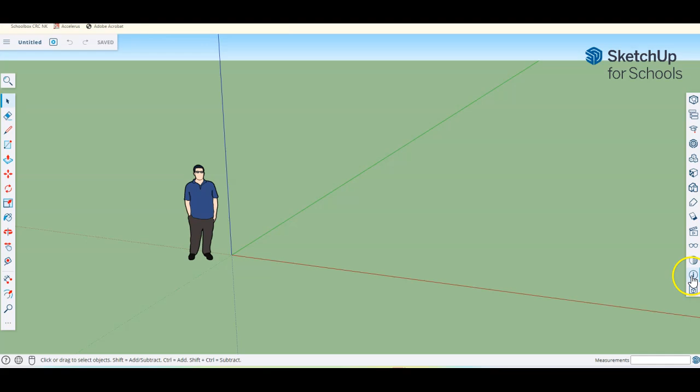I'll just jump into SketchUp here. As always, create a new project. Most importantly, when you start any new project, remember to check your measurements. Go to the little information button, length and units. Make sure you are set for millimeters, and 0.0 for precision is acceptable.

And then we're going to put that away. You can get rid of the little person if you want, they're not really needed at this point. And we're going to begin our modeling.

As we've been doing in previous models, start by thinking about the basic two-dimensional shape that you might want to begin with. Of course, each of these sides of the box are going to be simple rectangles as a basic shape that we then pull up into a three-dimensional piece.

I'm going to start with the longer side, which is going to be 120 millimeters long by 19 millimeters thick, and that's going to then be pulled up to 70, and we're later going to apply the rebates to that. So let's have a go.

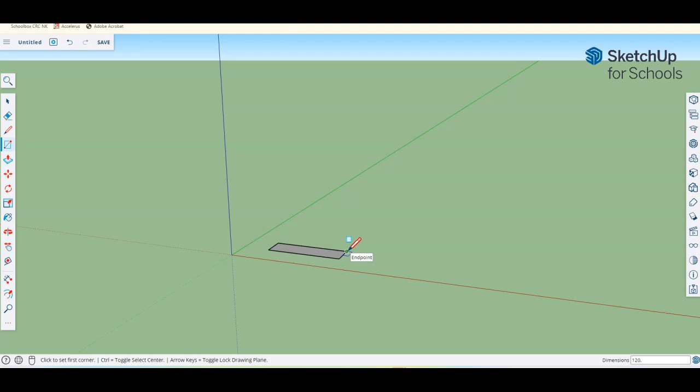We're going to draw the basic shape, so we know it's a rectangular shape. We let go of our mouse and type in our measurement: 120 long, comma, 19 millimeters for our thickness, and press enter. Of course, it should look like it shrunk down in this case.

We're going to zoom in. Of course, I am using a mouse, so I can use my scroll wheel to make it a lot easier. If you're not using a mouse, I strongly still encourage that you do - it makes life a lot easier in SketchUp.

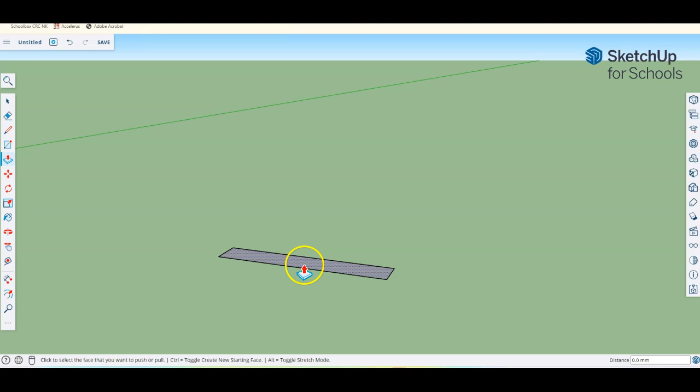Let's take our push-pull tool, grab the shape, pull it up by any amount, doesn't matter, just so long as we can see it is moving how we expect. Let go, type in our 70 millimeters for our height, press enter, and it sets its correct height.

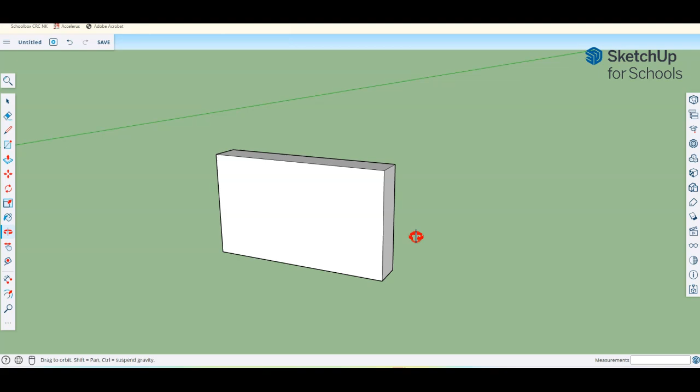So we now have our basic piece of wood, as if we cut this in class. We're now going to apply our rebates to this one. We know the rebate needs to be 19 millimeters from the end, because that is the same as the thickness of the piece of material that's going to slot into that. Again, this is something we've learned about in class by this stage.

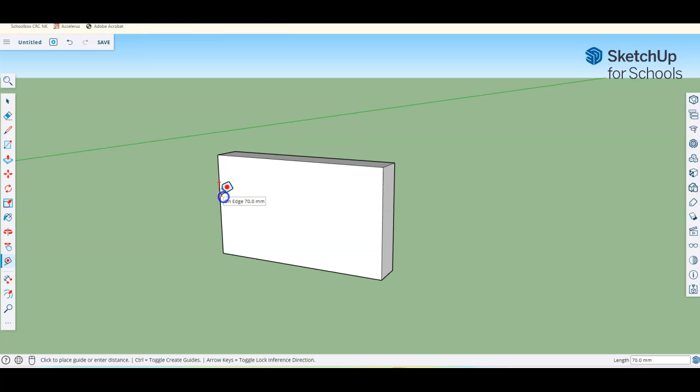So we're going to start doing that with our tape measure, it's the easiest way - just having a little mouse issue there, sorry. From the edge, let's come in, type in the 19 and press enter. We'll do that on both sides. Very important that we stay on the axes, type in our measurements, and come both sides.

Now remember, we can't push-pull with these lines because these are just construction lines, like temporary lines. So we're going to get our pencil now so we can actually fill in the part that we need. Using the intersection of the construction line and this edge, making sure we mark that point, let's bring that line down to match the other end, and the same on both.

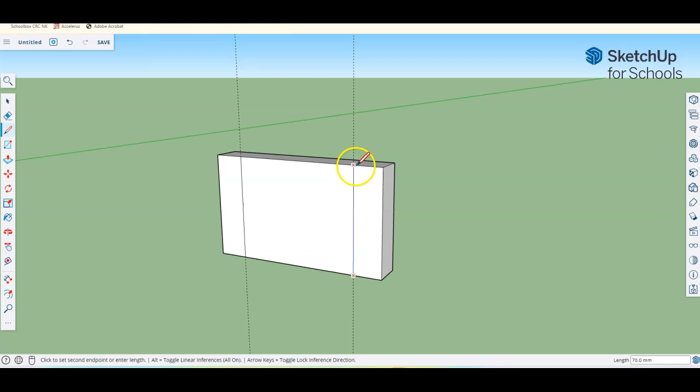This has created individual sections on our face, remember? So we can take our push-pull tool and see that each of those are separate, which means we can push that one in by 9.5 millimeters, because that is half of the thickness we want here. We can come across the other side, do the same, push it in, type in our 9.5 and press enter.

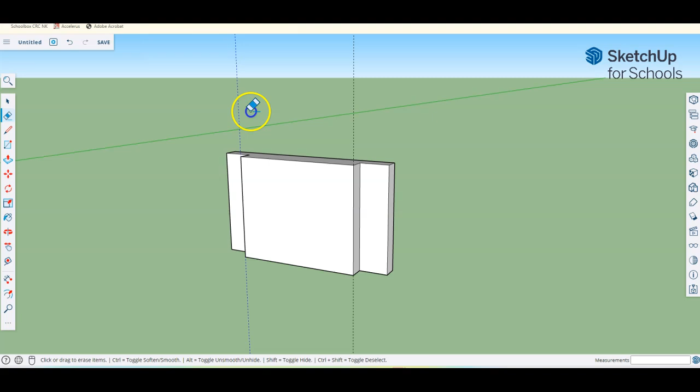So we now have our two rebates shown. Take the rubber and rub out our construction lines, and we have a finished piece.

Last thing we want to do to this piece before anything else is to highlight everything and turn it into a component so that we can move it around and duplicate it safely. Let's call this the rebate side and just press enter to save that.

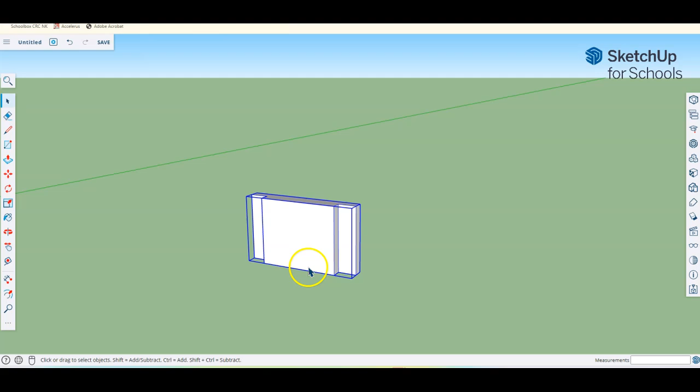So I have one piece, but if I now just zoom out a little bit, I want to think about a second one of these, because of course there are two sides to this. So what I'm going to do is simply, while that's selected, I'm going to copy it. So copy and paste. All right, and I'm going to put it over this side here. But this one's going to want to flip around 180 degrees to be facing inwards, because we've got one on each side.

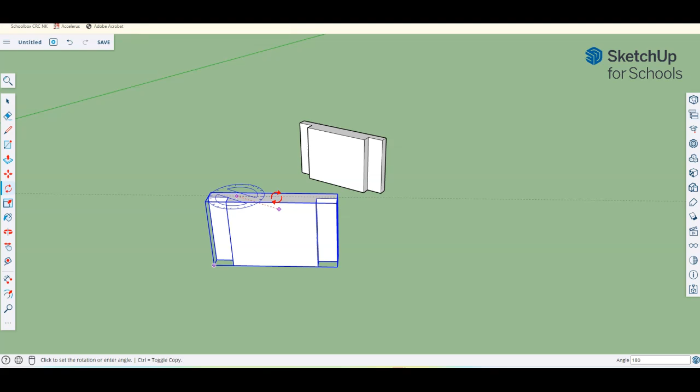So take our rotation tool, make sure that we are rotating on this top axis here. So 1 click, 2 clicks with the handle. Check that it is rotating in the way that we want. And of course, then I can just type in my 180 for the rotation amount. So it perfectly rotates 180 degrees, and we are done with that piece.

Now I'm going to jump back to the model for a second. These are the two pieces we've just done, this back piece and this part here with the actual rebates cut in. We now need to make this piece that goes in between. But it's important to note that it's not going to be 120 millimeters long. It's 120 from this corner to the very back corner, but we have to take into account the little bits, the 9.5 mil here, the 9.5 mil here, that we have for the rebate.

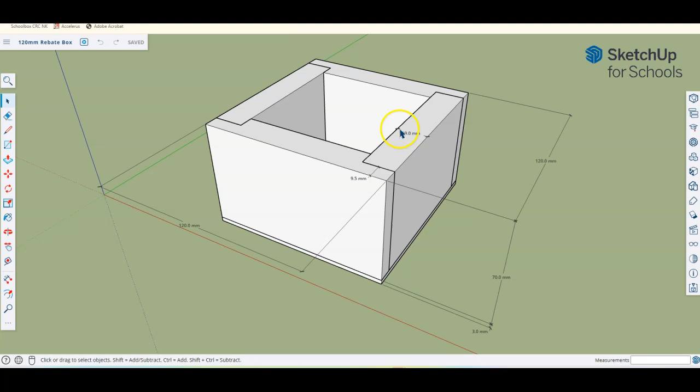So that 9.5 and that 9.5, if we add them up together, of course, we get 19. So really what we need is 120 millimeters from edge to edge minus the 19 that makes up the rebate, which means this piece in between is actually going to be 101 millimeters to get a total of 120 still. So we're going to model something that's going to be 101 millimeters long, still 19 millimeters thick and 70 millimeters high.

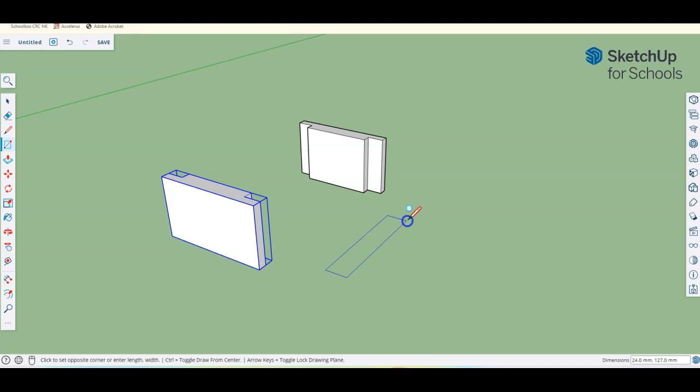So jumping back to the model that we are working on now, let's take our rectangle again and start with our basic shape. Now I could draw it crossways like I've been doing, but I know that later on I'm going to have to then rotate it 90 degrees to face this way. So why not start in that direction so that we don't have to do some extra steps? So I'm going to draw it this way instead. The only problem there, if I look down at my bottom corner, I have to reverse the measurements when I type them in, because my smaller measurement 24 is obviously this measurement across at the moment, and my longer measurement 127 is obviously this way.

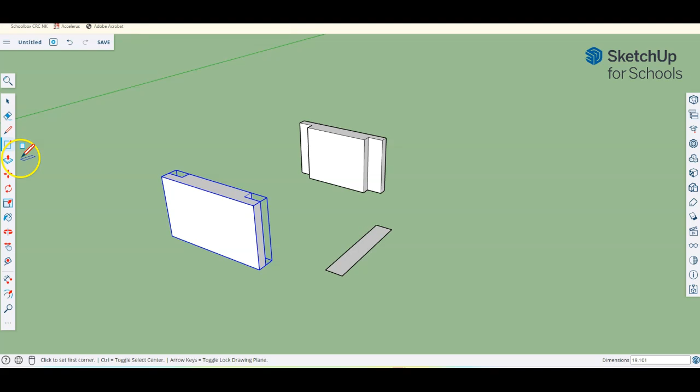So in this case, what I really want though is 19 still for the thickness. This has to be the first measurement this time. And as we just talked about, 101 for our second measurement, and press enter. So again, we've got our perfect shape. Take your push-pull tool and again, bring that one up by 70. We've done this lots of times now. And that is a finished piece now. There's no joint to do on this because the joints are done on the other piece.

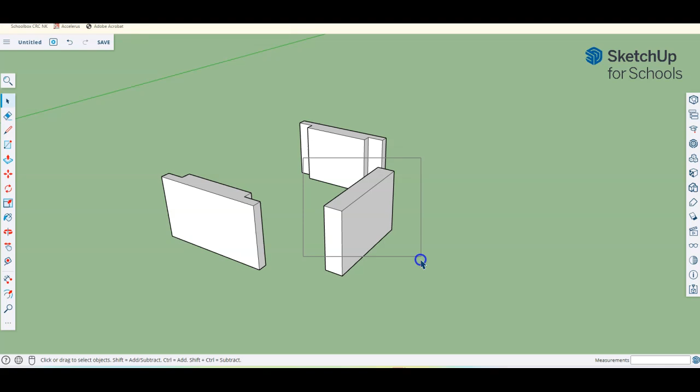Let's highlight everything that makes up that piece. Now, it doesn't matter that some of this is behind in the selection because it's not completely enclosed, because of course this is one big component, so I'd have to draw something that enclosed all of it if it was going to be made part of the selection. So this is safe to do. And we'll right click and make a component out of that as well. I'm just going to call that side, nothing special.

Like before, I need two, so I'm going to copy and paste that. I'm just going to put it roughly over this side here as well. So I now have all four pieces, two that we've done rebates on that were 120 millimeters long, and two that we've worked out need to be 101 millimeters to fit between. Let's start bringing those together. So I'm going to start with the one closest to me here.

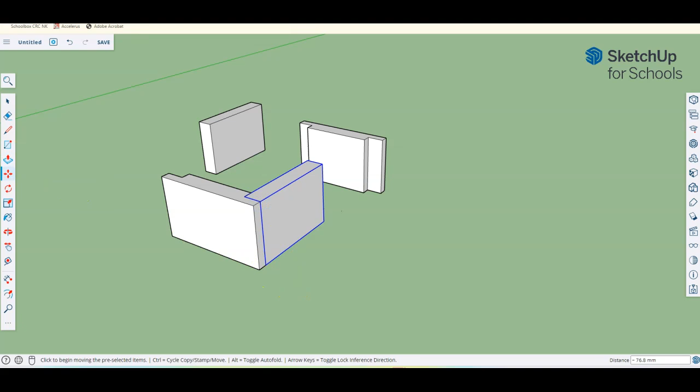I'm going to bring this side to join into this rebate, and we know that we can lock corners, for example. So I'm going to lock this corner here to where it would touch this corner here. So using my movement tool, let's grab that corner and let's lock it in place there. Let's do the same with the other piece. I'm going to grab that one over there. I might zoom in a little bit closer. And again, I'm going to lock this inside corner to the inside of the joint this time. And finally, I'm going to choose the back part with the rebate.

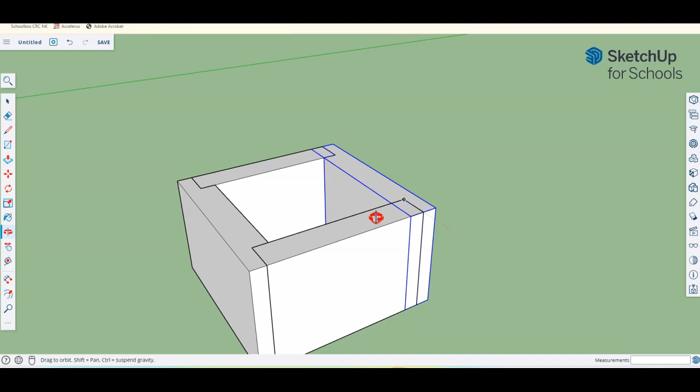And again, I'm going to lock that in. So let's use this corner here and lock it with, done that wrong, sorry, back corner there, and lock it with this one here. Sometimes you might need to rotate to get a better view. Remember, you can pick any corner, just as long as you can see where they touch each other, you can then lock them together. And we have finished the frame of the box.

Now, the last piece we need to model is the base, because of course, if I rotate this round, I can see straight through it at the moment. Now, there's two main ways you could probably do that. First one, of course, you could come over to the side, model a piece that's 120 by 120, and then pull it up to be, or down for that matter, to be 3 millimeters. And that's the base for your box there.

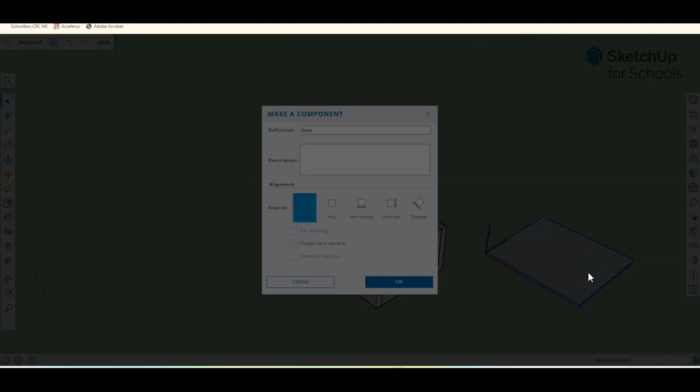You can grab that piece after turning it into a component. So let's do that quickly. Component, make component. I'm going to call this base. And of course you can move that into place. So I could take my selection moving tool, grab that top corner there and with a bit of playing, eventually get it to line up properly. There we go, it's just locked in now. And of course now I do have a base on my box.

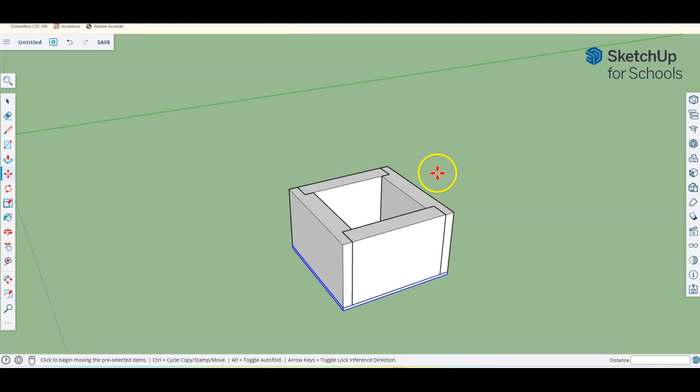But there's another way you could do it that might be a little bit more easy in some ways, I guess. So let me just delete this base there. Another way I could do it, because each of these are components, I could just literally rotate around to look at the bottom. I could take my rectangle tool and locking from one corner to an opposite corner, I could literally draw that shape in.

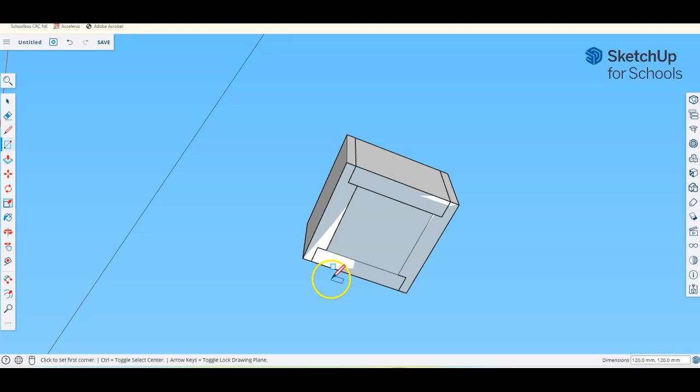We know it's going to be the right size because it's matched exactly to the box because we've used the corner references. And it's not affecting the box pieces themselves because this is a square, even though I can see the lines through it at the moment, but this is a square drawn on top of other components, and those components are not being modified. So I can still take my push-pull tool then and pull that down, type in 3mm, and of course I've now got a base.

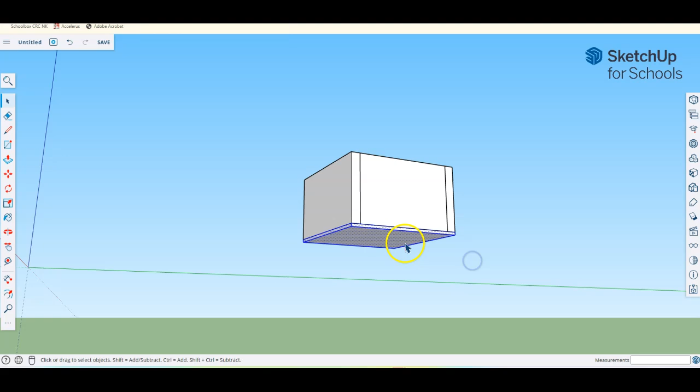I do want it to be a component still, and again I can grab my selection tool, I can draw a box that will grab all of that base, and the same as I said before, it's not going to affect the rest of it because I'm only selecting the whole base. None of the other sides are fully enclosed in this selection, so when I let go it is still only choosing the base parts. If I do look around, no other sides or parts were selected because they weren't fully enclosed in that selection box. So I'm still able to do that, make a new component and call this base. I'm going to call it base 2 just for reference.

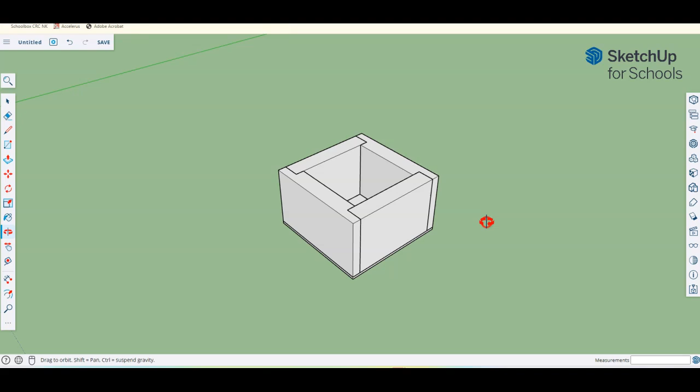So there was two ways we could do that. So again, ended up at the same point though, where we have all our sides done and we have a base properly modeled on. The final thing I'd probably do at this point is just double check some measurements. So take your tape measure, do things like check your thickness is still correct, 19, so on and so forth. Or even better, grab your dimensions tool. Remember, if it's not showing up there for you, grab it out of the full set of tools by clicking on the 3 dots, grab your dimensions tools, and let's put some dimensions in.

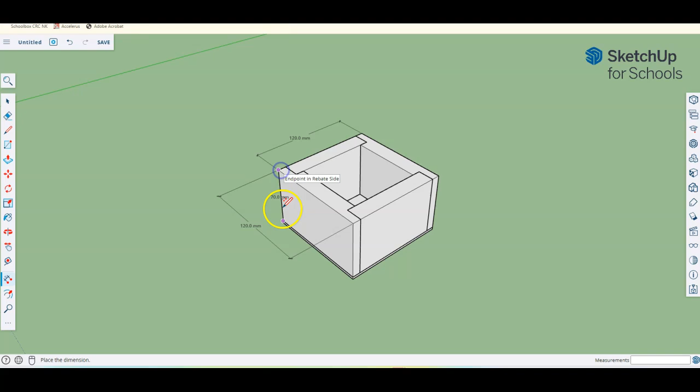So for example, let's show that the full length here from corner to corner is 120. Let's show that the full length from corner to corner on that side is also 120, and maybe include the height there as well. Sorry, I've clicked the wrong part there. Height, being careful that you don't include the base at that point. That's going to be 70. If you want to show that the piece in between, for example, is 101, you can choose that. You can obviously show the thickness of the rebate if you wanted to, each of those pieces.

So you can go through and show all the different measurements that might be relevant to prove that your model is correct. But also to help you then, if you needed to use this as a plan for actually physically building this later. So you could print this out, take a screenshot, etc., and you'd have all the measurements. And in fact, that is how I create the plan that I have available for you on Schoolbox as well. So once this is all done, save it, of course, as you go, and then you can submit this for assessment if that's what you need to do, or if you're just following this for your own interest, you now have a modeled box.